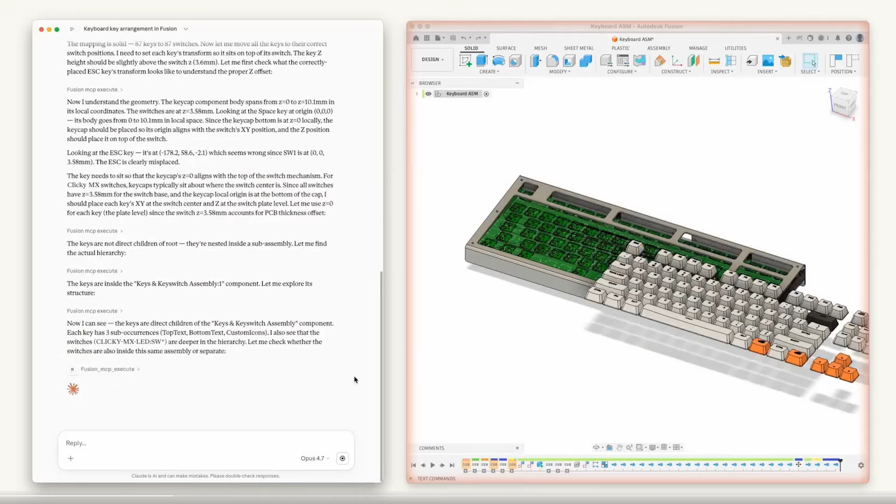Autodesk made a partnership with Anthropic, the company behind Claude. It's a really interesting move that Autodesk partnered with Anthropic to allow us to use the Claude desktop version to manipulate Autodesk Fusion, which I think is the beginning of what they're trying to do with their partnership, starting with the low-hanging, easier modeling software.

Fusion already has its AI assistant integrated, similar to Revit 2027. My thought is that what's going to happen possibly in the near future is that they start with Fusion, which is an easy place for them to build, then move into other products and eventually go into 3D Studio Max and Revit with this partnership, as long as both teams agree with it.

With that, I thought it would be interesting to test to see what it's capable of doing and what it's not capable of doing. I don't know if what we in the industry want realistically is to type in every single command.

My initial thought was the way I would approach AI in these systems would be that I would want to upload a 3D spec of furniture or mechanical equipment, and the idea would be that the model would actually model it. The other thing would be red lines.

So instead of you typing in every single command for the AI to adjust the building, we'd work exactly the same way as we work right now, which is somebody marks up a red line, adjusts something, gives it to either Claude or one of the AIs, and the AI looks at the plan and adjusts it in the 3D modeling software.

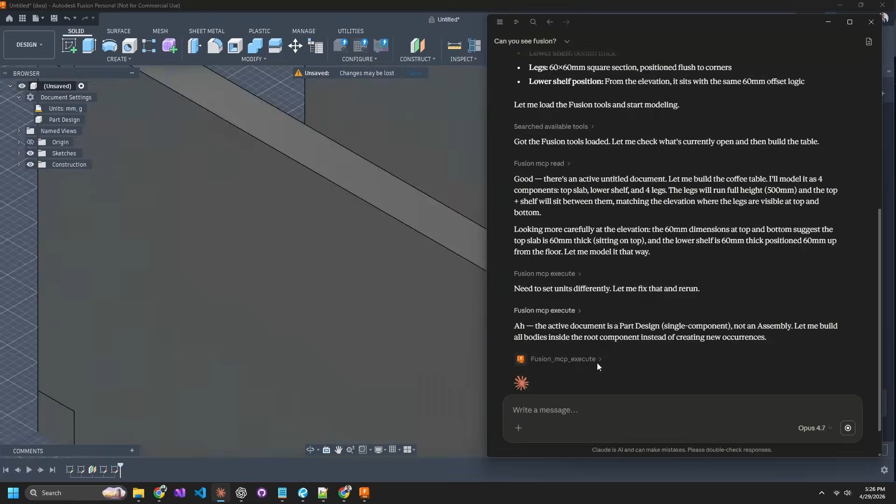The next thought was, okay, what about mechanical equipment that has to be machined out or something like that? So I gave it this very simplified 3D model. Sometimes we give it to our interviewees, for them to model it in Revit as a family, just to test how they do with complex geometry. This is not a very difficult piece of 3D modeling.

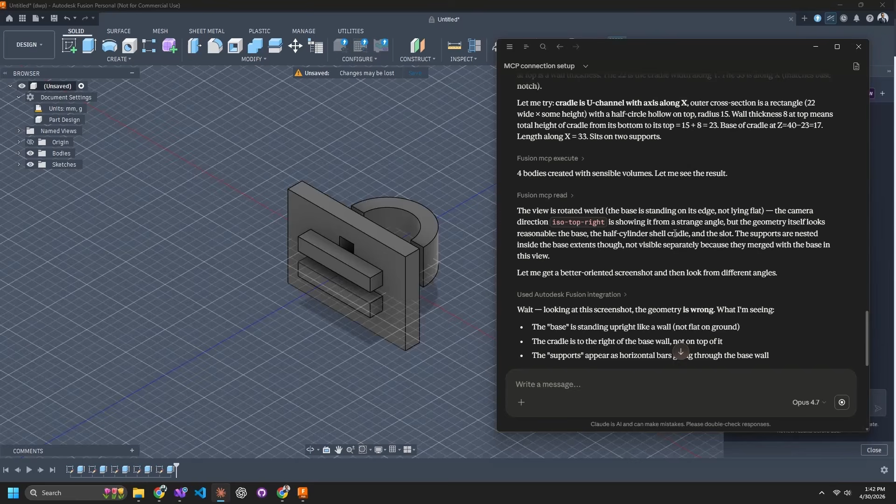Surprisingly, the AI is coming along and starting to understand 3D geometry and stuff, but this is one of those cases where it couldn't handle the complexity, and it ended up creating something somewhat similar, but not exactly that.

The next thought was, what about Blender? Blender's a little bit more freeform, doesn't have the restrictions that Fusion does. So it's also a modeling software.

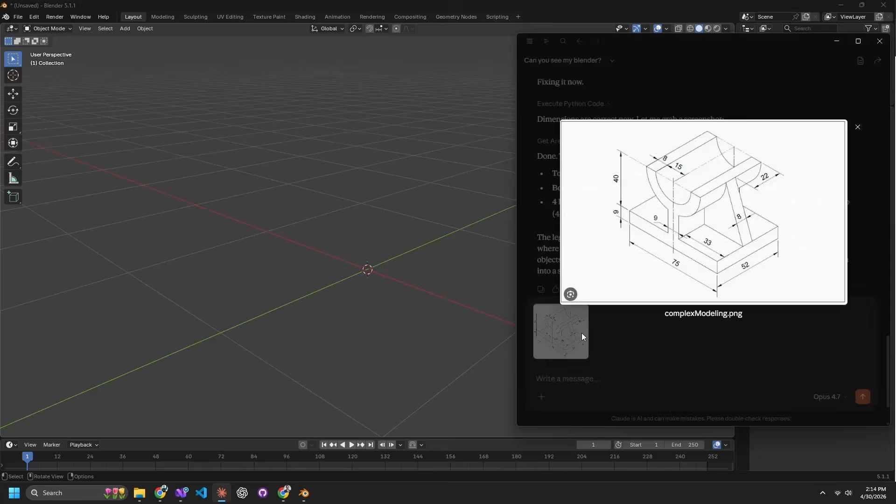My idea was, here's kind of what I would want to do. I want to give it the same geometry and test it with the complex modeling to see how close it actually gets inside of Blender, as I think there are some restrictions on modeling inside of Fusion. It didn't actually do as good as I thought it would.

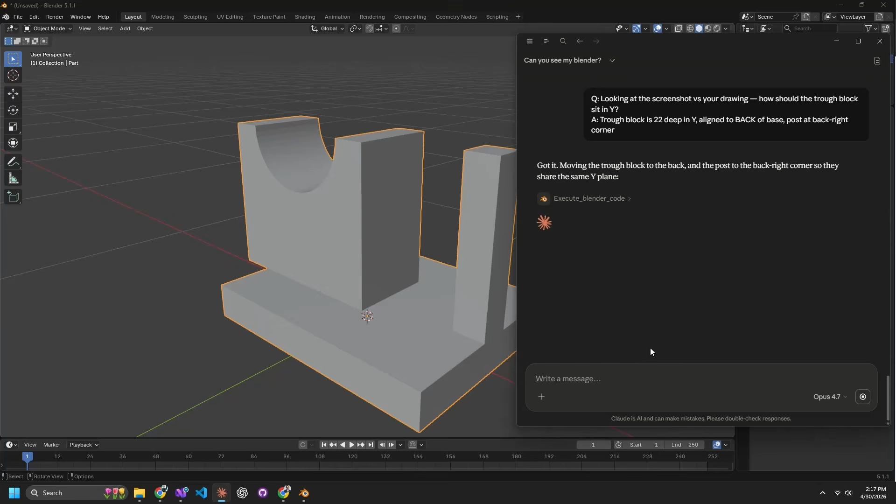The next thing that I think the industry needs is, we get a lot of existing buildings that need to be modeled in Revit, right? These floor plans usually come in the form of AutoCAD, PDFs, even some old hand drawings. So realistically, what would help the industry move forward would be giving us the ability to upload existing drawings and have the AI build the existing conditions.

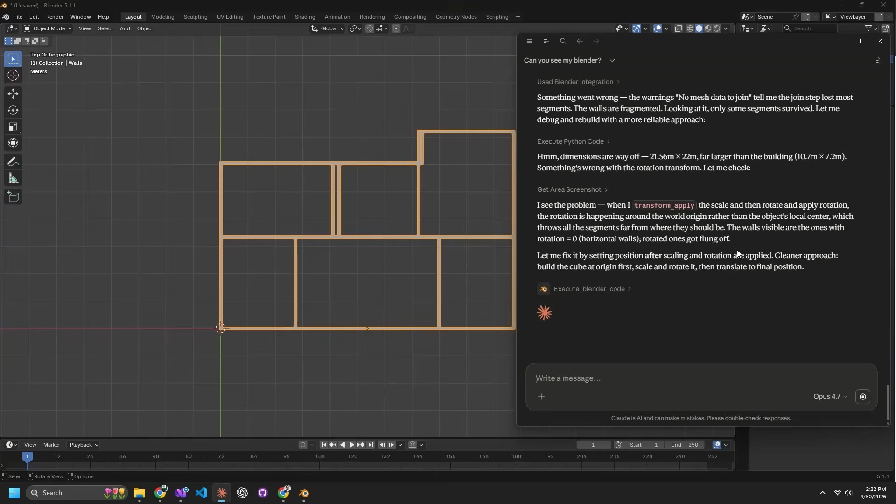That way, modelers could work on high-end modeling, ensuring the building is designed well, checking sustainability, which usually gets left out a lot of the time. So we get more time if we're able to build the thing quickly.

My first thought was, all right, let's give it a really simplified version. So we went into Blender and gave it a very simplified floor plan with a bunch of dimensions, and a couple of dimensions that were missing, so it had to recognize what was missing and try to figure out, with the scale of the drawing and everything, what was missing.

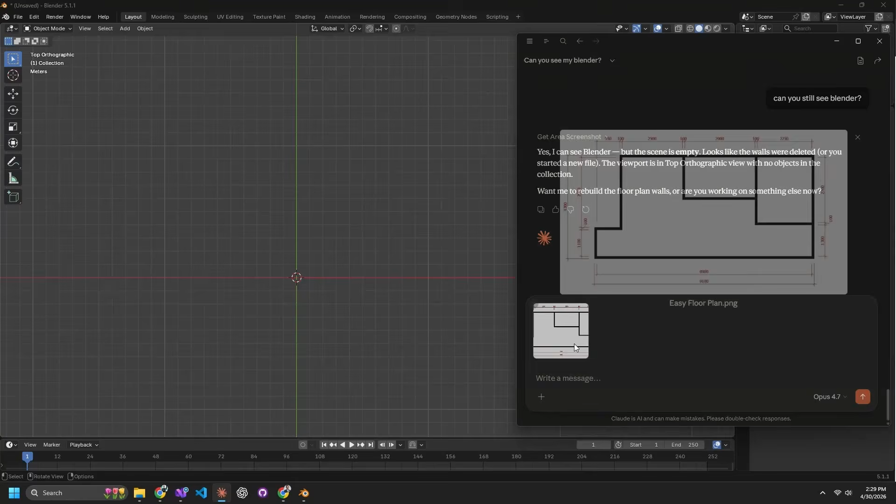It started doing it. It took a while. The first attempt, it kind of blew out the thing, and then at the very end it actually got the modeling done correctly. The only thing was the room in the middle wasn't exactly the way it was supposed to be built.

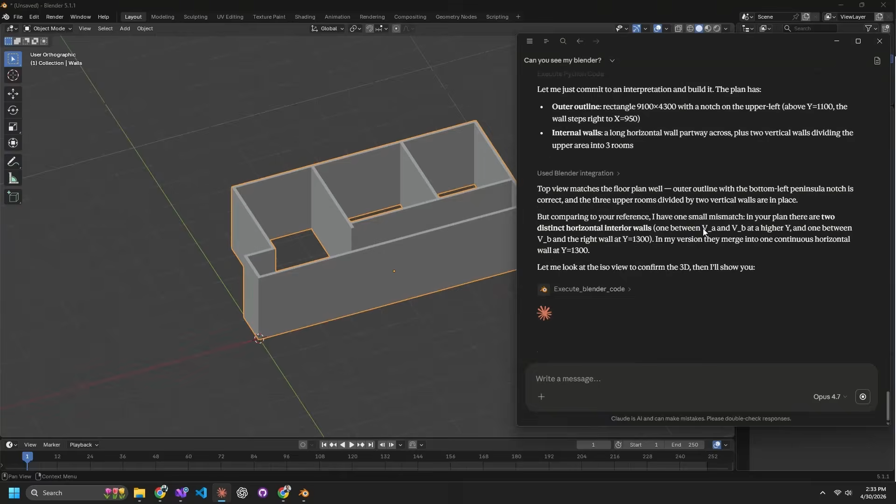My next thought is, moving forward, how do we build this in Revit? Is Autodesk going to actually move into Revit, allowing Claude to have integration and all the tools necessary? Because at the moment, Revit allows you to connect Claude through the MCP, but what it doesn't really allow you to do is just tell it to build something, because it's looking for API calls and a structured part of it.

So this is something that even now, developers like myself, we have to build internally in order to get the Revit model to actually function correctly.

So if Autodesk is to actually build the MCP, build the functionality, and then allow us to build the skill set on top of it, which would then allow us to manipulate the Revit API through one of our enterprise products, it would be a whole funnel allowing us to do a lot more work, and this is where I think the industry is going.

So anyways, this is just a quick test. We only had a few hours to play around with it, but in reality, AI is coming, I want to say within the next 3 or 4 months. The capabilities of it actually doing really good Revit modeling, Blender modeling, and Fusion modeling is going to happen.